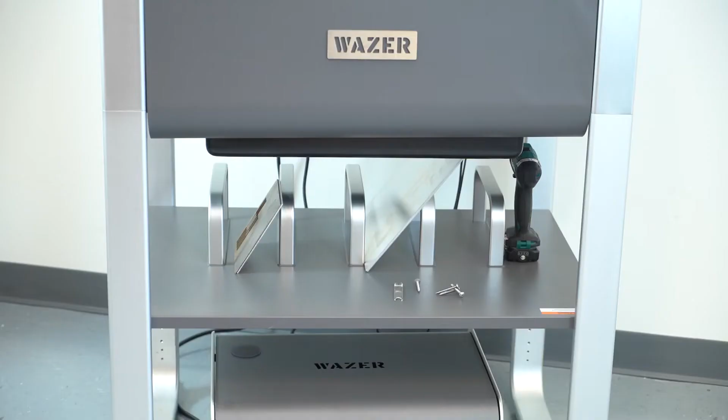As we go down, we'll see that the WAZER has a stand leg accessory. This is optional, but the stand leg accessory is a great way to make your machine a freestanding unit, as well as a shelf to hold and organize your materials and tools.

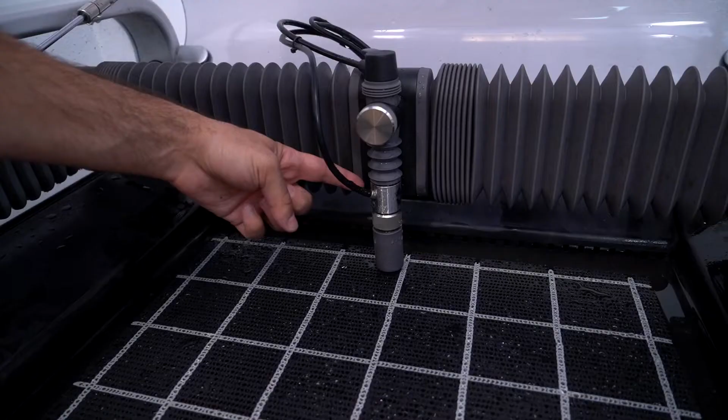At the bottom, you'll see we have the pump box, which is the heart of the machine. It takes your water connection and creates high pressure water that's fed up to the nozzle. As it goes through the nozzle, it's pushed through a ruby orifice, and that's what focuses the beam into the mixing chamber. From there, we have this secondary hose, which introduces a garnet abrasive sand to the stream. That abrasive slurry is mixed and pushed through a carbide nozzle, which performs the high pressure cutting stream.

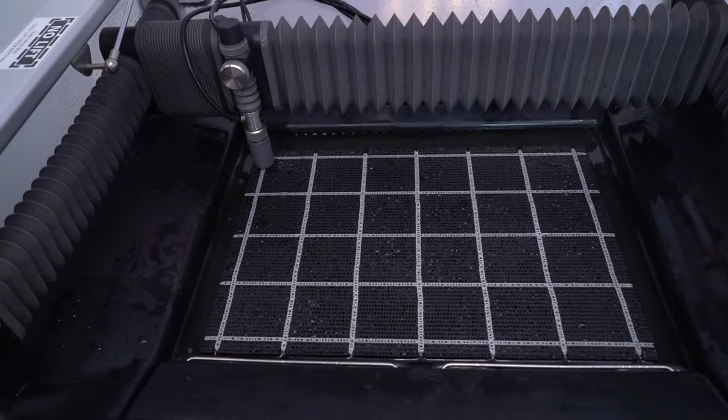Now let's take a look at the cutting bed a little bit. This bed is a 12-inch by 18-inch cutting extent. The bed is made of a hard polypropylene plastic. You'll see it's corrugated, and that's to serve 2 purposes. First, it's very easy to fasten your material down using standard wood screws that you could fasten into any part of the bed. The second purpose is to help dampen that water pressure.

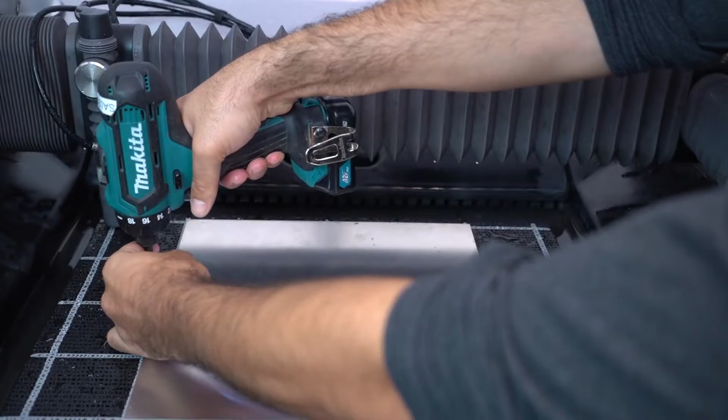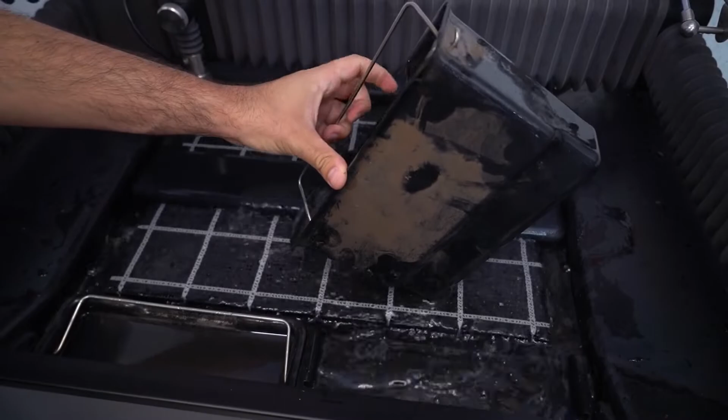As you cut your material, you will also cut through the bed, and that's intended. As you make your cuts, the abrasives collected at the bottom of the tank, and using 4 venturis, it'll push that spent abrasive slurry into the collection buckets at the front of your unit.

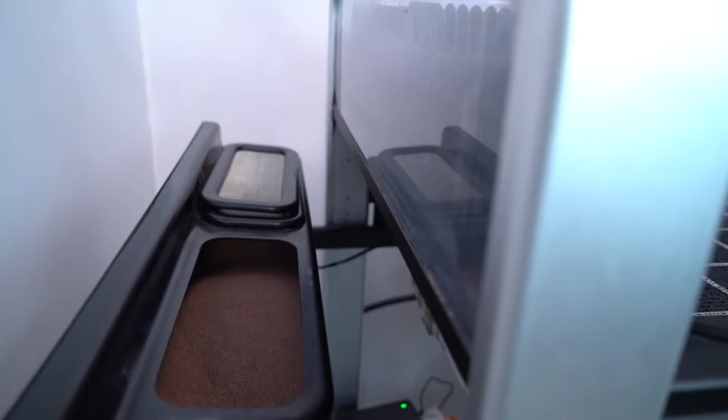On the side of the machine, you'll see that we have an abrasive hopper. Here is where you pour your fresh garnet abrasive sand. Our machine uses 80 mesh garnet abrasive. We use this because it's the same standard as the large format water jets. It's very easily sourced, and it's a natural inert stone, so it's safe to toss in your regular garbage.

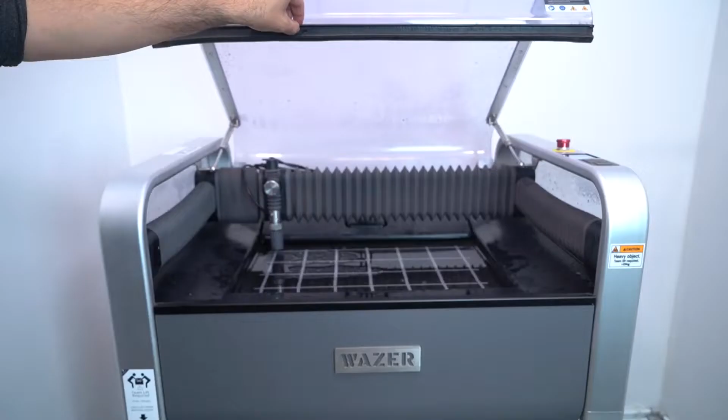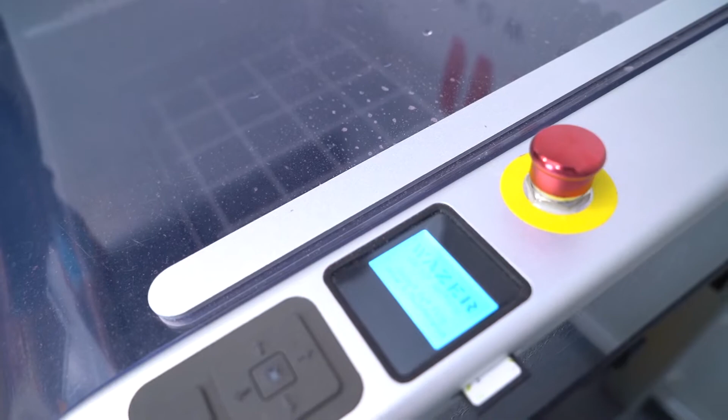You'll see that the WAZER has a fully closed environment for operation, so you can watch your cuts while they happen live and not worry about getting wet. The operation of the WAZER is done from this button navigation system in the screen, and we even have an emergency stop. If you press this, it'll shut off the entire power to the machine.

That's a basic overview of the WAZER and all of its components. Now let's go ahead and prepare our cut today.

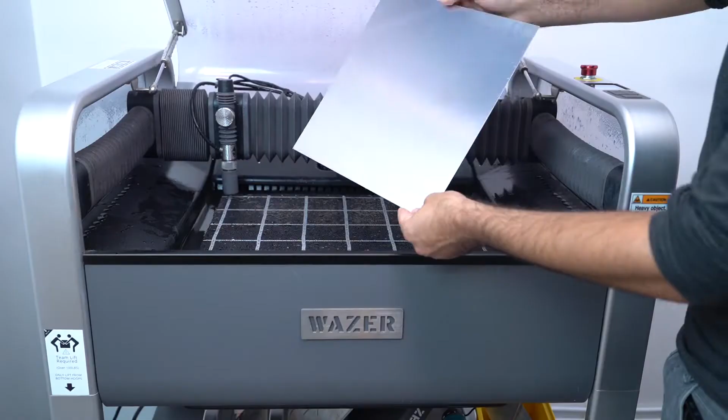Here you see I've got some 6061 aluminum, 16 gauge thickness. We're going to go ahead and place it right at the center of the cut bed here. Next, we're going to use the screw fasteners to place it into the center, screwing down into the bed to fasten our sheet down. Here we're just using a standard hand drill to put these wood screws into the bed.

And then I try and push it around to make sure it's fastened down. As long as it doesn't move, we're good to go.

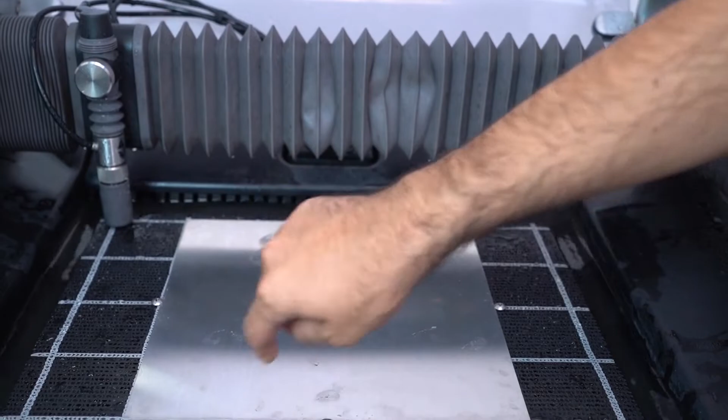Next, we need to level the nozzle height. To do this, we grab the nozzle, and on top of it is the level gauge. We seat this right on the aluminum, loosen our nozzle, and lift the nozzle and seat it right on the lip.

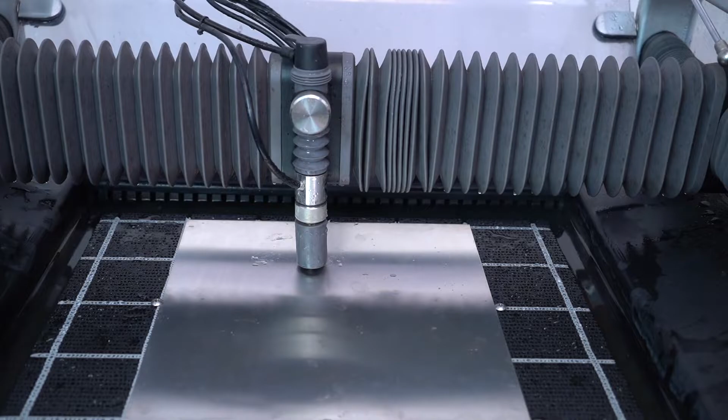This is the recommended distance you want between your nozzle head and the material. When done, place it right back on top. Now our nozzle is ready to go.

You could also use this time to ensure that you don't have any screws sticking out too far. You don't want any obstructions to run into your WAZER nozzle during the cut.

Next, we're going to go ahead and perform a dry run. A dry run is a feature built into the WAZER that allows you to perform a cut without actually turning the machine on.

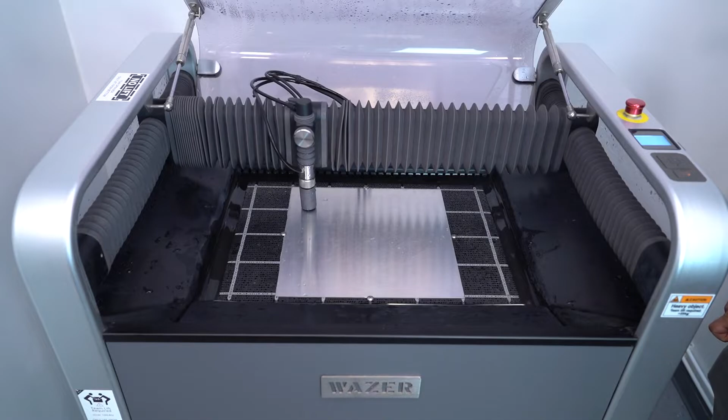Right now you see that the nozzle is traveling the intended path. This is a great way to check by eye to ensure that it's traveling on the correct part of your material. If you need to, you can also change the origin at any point here using the arrows on the machine.

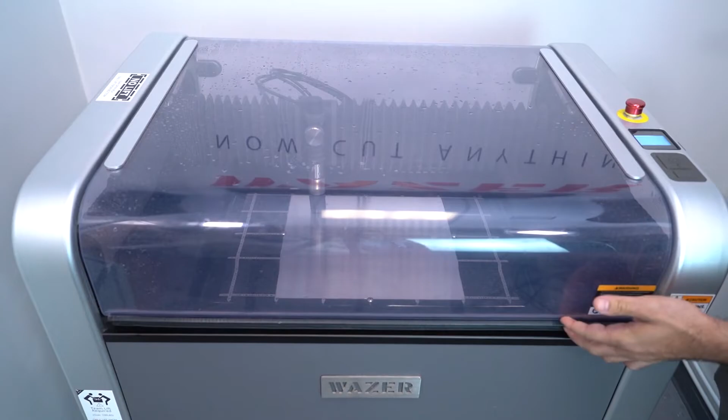Let's close our lid and get started on the cut. Let's go ahead and take a look at the software portion of this demonstration.

WAZER uses a software called WAM, which is our CAM software, and allows you to take your design and turn it into a finished G-code file that the machine can read. Now our software accepts any design in DXF or SVG format.

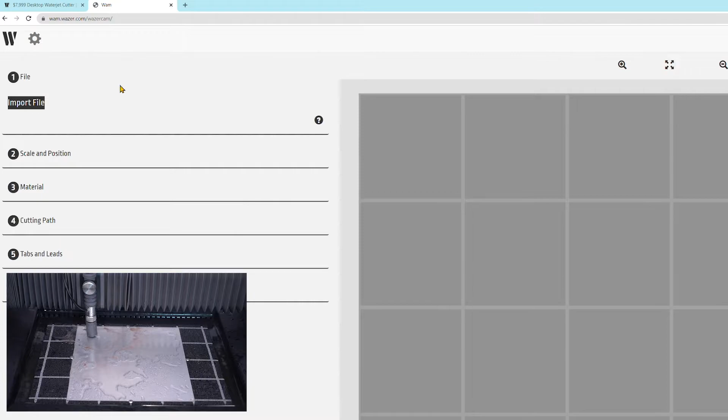Here we are uploading our DXF design that we'll be cutting today. You'll see when we select the design, we can place it anywhere on the virtual cut bed, and it can move freely. For example, if we want to cut on the top left of the bed, we'll place it up here. The grids on the bed mimic the grid on the physical bed.

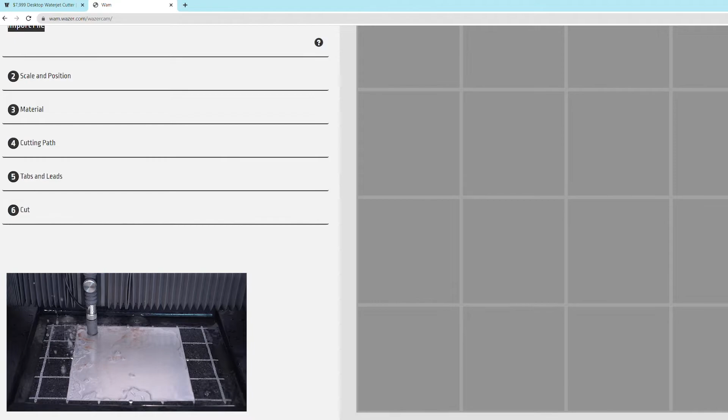In the same way, if I want to move the design to the bottom right of the grid here, that's where it'll cut on the cut bed.

The first step also allows you to do simple things like nesting. Nesting is a great way to copy your design for short-run production of parts. You'll see that we can freely move each individual piece.

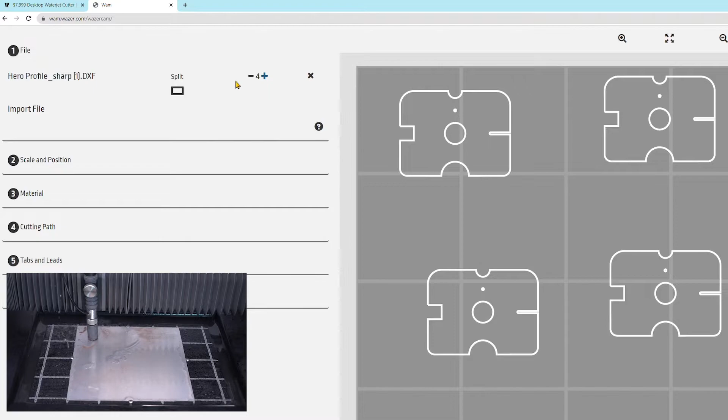In the second step, we can do some other alterations like rotation, location, and scaling of our design. This is a great way to do some last-minute changes to your design outside of the design software.

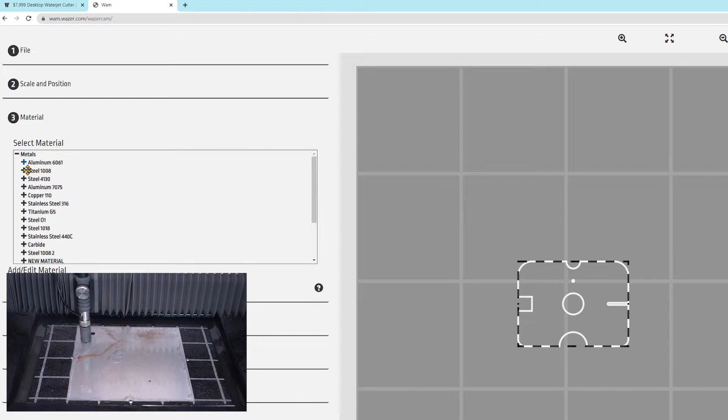In step 3, we take a look at the materials profile list. Here, we have a list of common materials our customers are cutting at different thicknesses. What a material profile is, is a list of materials at different thicknesses where we've performed a cut rate test.

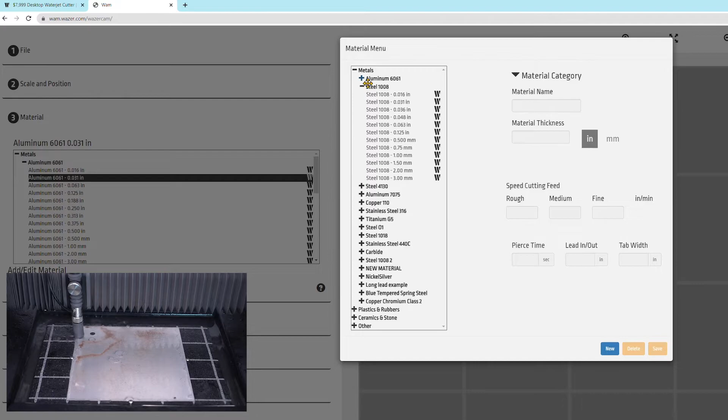Let's take a look, for example, here at some aluminum that we're cutting today. Here you'll see we have labeled a pierce time, as well as a rough, medium, and fine edge setting. As we go thicker, the cut speeds reduce to compensate for edge quality.

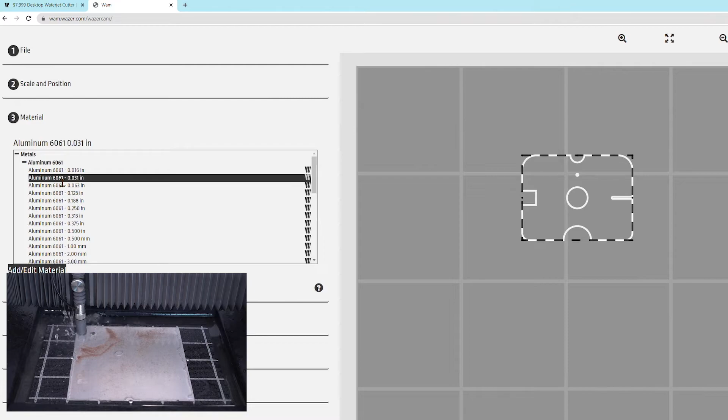Once we select our material profile, then we can go to the cutting path. Let's take a look at step 4. In step 4, this is where we choose our cutting path.

One thing we have to take into consideration is the kerf of the water beam, or the thickness of the water beam. If I cut on center line, I'm not compensating for the thickness of the beam. So instead I'll choose an outside cut.

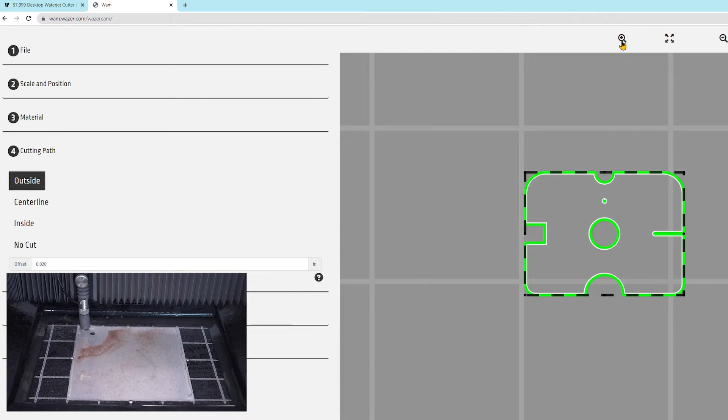The software intuitively knows to offset the water beam to the outer profile, and because that circle and that pierce in the center are closed profiles, the inverse happens, and that cuts on the inside. This is a great way to achieve different tolerances on your pieces.

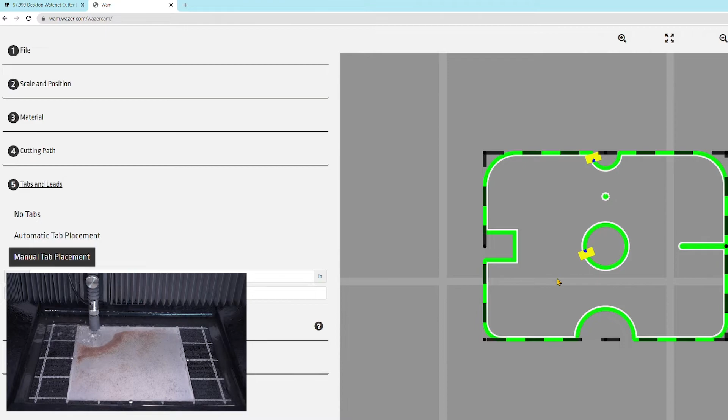Here you'll see we're adding tabs and leads. A tab is a little bridge of material that keeps your pieces organized together, so it doesn't cut all the way through. You can change the location of your tabs, and you can also change the size of your tabs, or have no tabs at all.

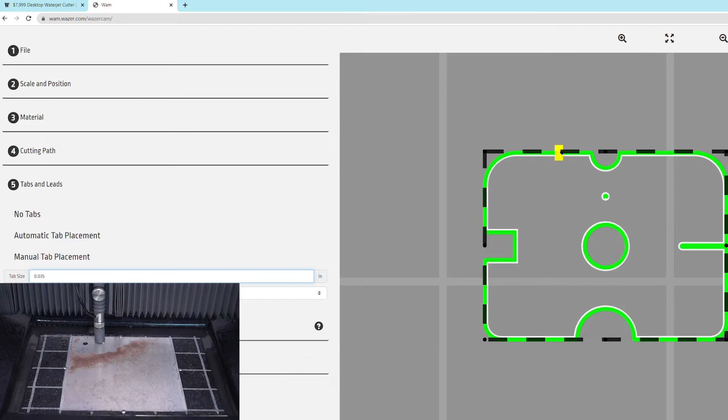Here you'll see we're changing the size of the tab, and you can also place any number of tabs anywhere on the piece.

Once you get to step 6, here's where you could choose your cut quality. A coarse cut quality will be a faster cut than a medium or a fine.

We give you the opportunity to organize how you want your pieces cut and to what edge quality. 3.5 minutes for this example to cut a coarse edge quality and get your piece out in a faster time.

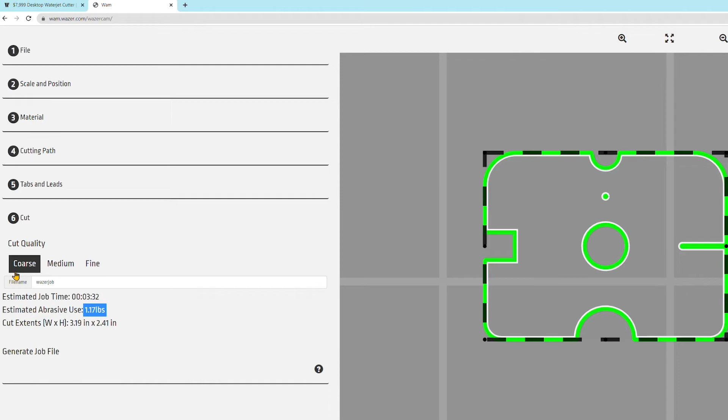If we choose a fine setting, you'll see that it takes longer to cut, but is going to provide a much better edge quality to your piece.

From here, you can name your file and hit Generate Job File, and this will produce a finished G-code file that downloads to your computer.

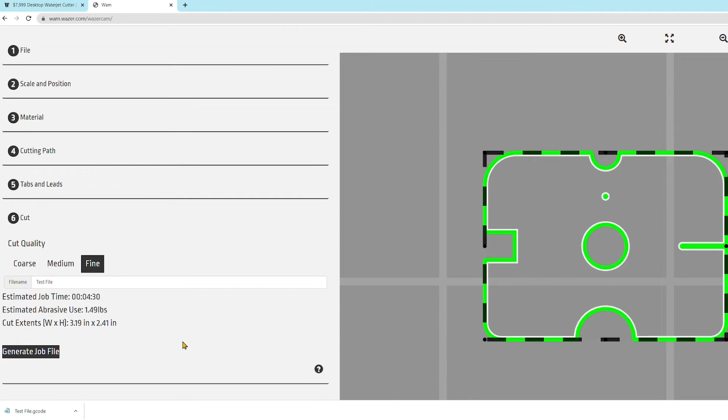From there, you can paste that onto the SD card, pop it into your WAZER, and you're ready to cut. Again, this software is free to use and available on WAZER.com.

Now let's go ahead and come back to our cut here. And as you see, we're finishing up our cut. As you cut with the WAZER, it's not uncommon for abrasive to sometimes collect on top of your sheet material.

For this reason, we say to use materials that are fine sitting in the water for extended periods of time. And now our piece is cut completely loose, pushed out by the water pressure a bit here.

Let's go ahead and move the nozzle and take a look at the finished cut. We're also going to rinse it off in the water here on the side. There you have it, our finished hero piece.